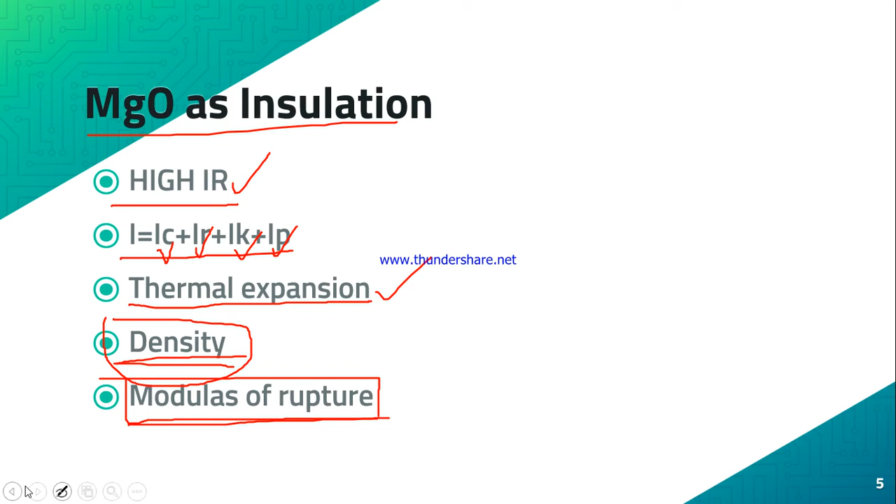So this manufacturing of the crushable mineral blocks involves a lot of special material property requirements. It should follow some standards - I'm not telling the name of those standards, but we are following ASTM standard.

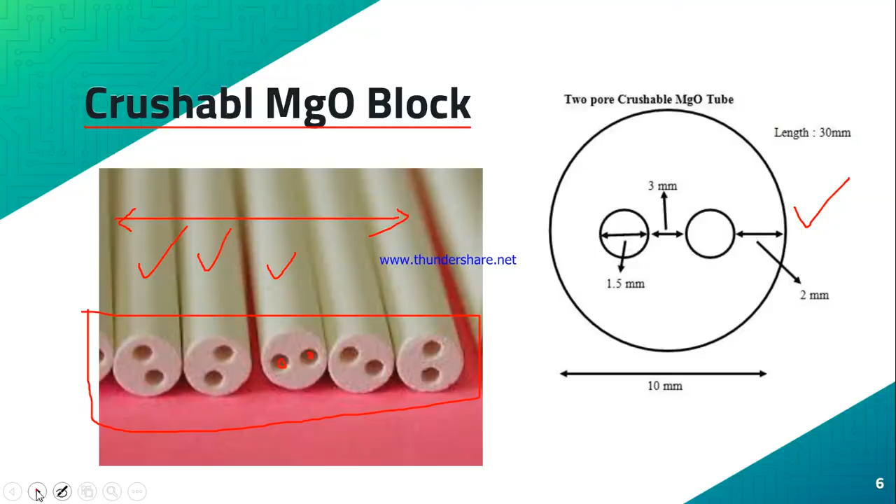So these are the crushable mineral insulated cable blocks, which is used to manufacture the MI cable. So here we are using, even though I am telling MGO, here we are using crushable blocks of steatite, which is also known as soapstone. So it's a type of metamorphic rock. Metamorphic rock basically comes out from the igneous original rock.

So these soapstone blocks, what I have shown in the earlier slides, these blocks are medium hard, because they should be crushed. When I show the next process, you will understand it should be crushed and it will be compact, and the density should be distributed uniformly.

And the chemical composition, I am not telling the exact chemical composition, we are just telling it's soapstone, but with that so many additives are mixed to cater to the required properties as mentioned in the manufacturing standards. That is written in some ASTM standards. So the chemical composition was also chosen to obtain excellent thermal shock and better heat resistance.

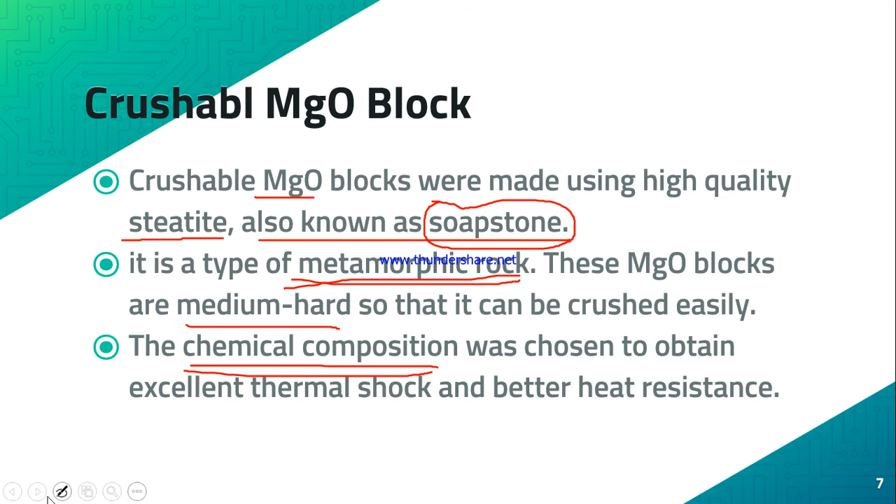So the electrical breakdown value, which depends on the leakage resistance, that also was studied, and the results are in agreement with the requirement of MI cable manufacturing suitability. So as I told, we replaced MgO and used soapstone. For that chemical composition, that soapstone crushable block, we have studied it, and it was found to be accepted as per the manufacturing standard. This involves mainly 3 steps.

One is cleaning of the tube, then filling, then swaging. So these are the outer sheath. We took the copper tube. The inner diameter of this copper tube is slightly higher than the outer diameter of the crushable soapstone block, because after swaging the pressure should crush the soapstone block and provide a uniform insulation. So it is to be cleaned properly, otherwise it can deteriorate the dielectric property of the insulation.

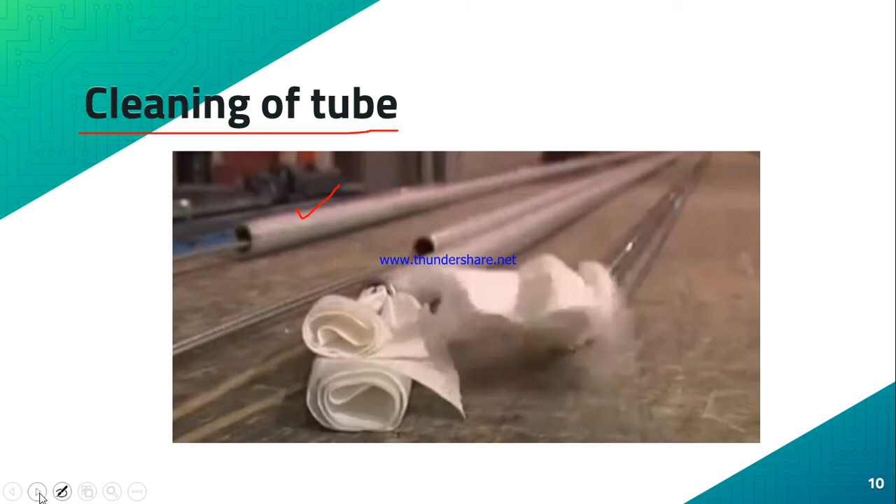Okay, now I am coming to the filling. You see, these are the soapstone blocks. One after another the conductor was inserted, and this process is called filling.

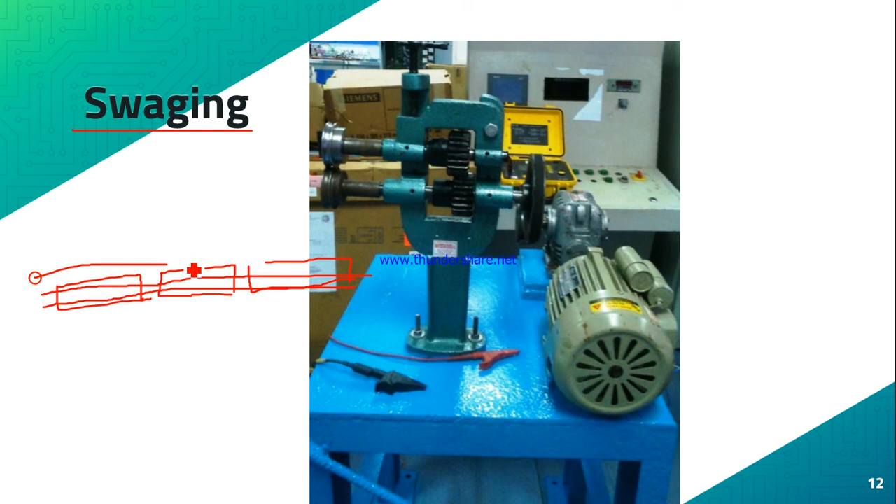So after filling, the next process is called swaging. After filling, say this is one block, this is another block, and this is another block, and in between the two conductors were inserted. That process is called filling. After filling, this entire thing is to be inserted into the main copper tube, which is basically the sheath.

After that, it is swaging. Basically it's a kind of cold roll. You see here 2 circular dies are there. It will be inserted, and it will reduce the diameter with slight expansion, and during this process these blocks will be crushed, and this joint will be filled. This process involves very high technical calculations, and based on that your chemical composition and everything is to be selected, otherwise these things will not work.

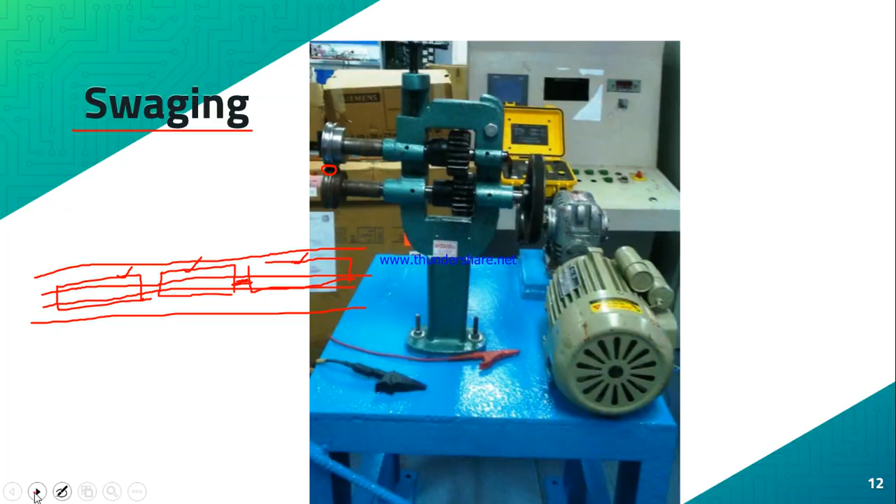You see, after swaging, once this process is done, for me I did it 5 to 6 times. After that it is completely crushed. But once it is swaged, the molecular structure of the metal is disarranged. Due to that, the brittleness, the hardness of the material, the copper tube, increases, which cannot be used in site conditions, because it needs some kind of ductility.

So you have to bring back the original property of the material. For that, basically you need to do annealing. It is nothing but a heat treatment where the cold drawn material is heated up above the recrystallization temperature and cooled down. So here also, when you are selecting the outer sheath material, the maximum temperature during the heat treatment should not affect the dielectric property of the material. So all these things combining together, we have to select the material. It's a very critical process.